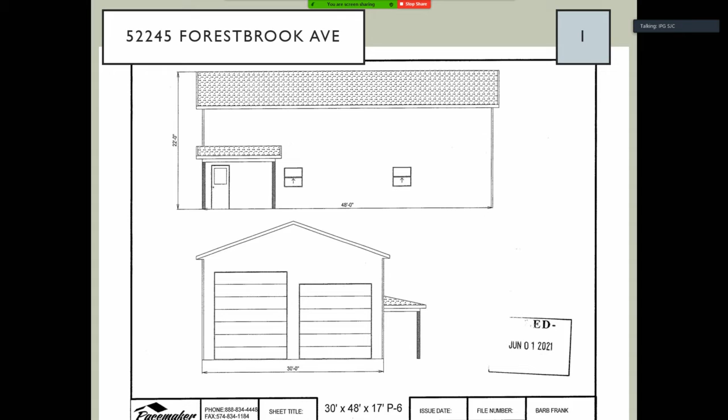So the 2-bay design is what's making the roof structure higher than what the written standard allows. There's additional site plan information in the packet and presented here. It's the staff recommendation that there's nothing unique about this property that would not allow it to be built to the standard as written, and that having such a large pole building would detract from the residential character of that area given the size of residential structures there, making it a very commercial-looking accessory building. The staff is recommending against it for that reason.

Just for clarification, this is a height request only, correct? They're meeting all other setbacks required for that spot. Correct, this is just for height.

Ryan, do you know how far back their proposed building's face would be from the road approximately? I don't have an exact distance, but they do have a site plan that they purport to be to scale. I want to say probably over 50 feet. I'm just trying to get an idea how that's going to sit next to that little green house. You don't know how deep the lot is, do you, the actual lot itself? The lot's 132 feet deep.

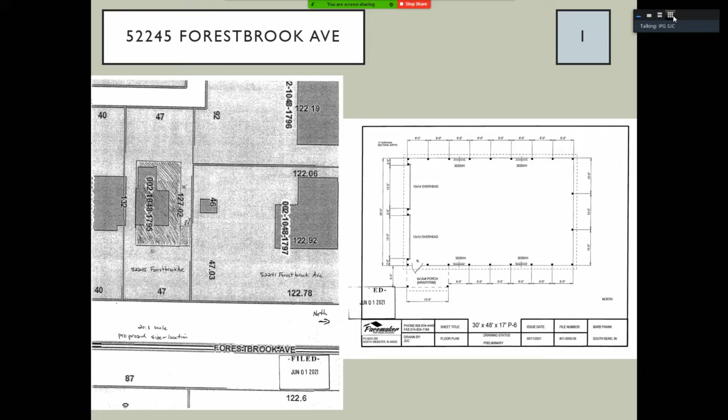Yes, ma'am, can we have your name and address for the record, please? My name is Barbara Frank. My address is 52241 Forestbrook Avenue, and I also own the property at 52245 Forestbrook Avenue.

Is there anything you'd like to add to the staff comments for your petition? Yes, I did suggest if we can't do the 4/12 pitch, my builder, Pacemaker Builders, suggested we could go down to a 3/12 pitch for the roof, and that would bring the overall height to 20 feet 9 inches.

I also reached out to him concerning what this gentleman had indicated, saying that the 19-foot variance would accommodate a 14-foot garage door for an RV, and he said you would still need a 14 or 16-foot wall height in order to maintain that 14-foot doorway. He said you would also need a 4/12 or 3/12 pitch as well for the oversized peak of the building.

Looking at the structure, is there a reason that it has to be double wide? Could you do the trailers in just one of them and shrink it down that way so it doesn't have to be so high, or is that not possible?

Right now, we have what you don't see on the pictures, or at my home. I have 2 campers, and we also have the enclosed trailer, and we need enough space to move around for both of those. Okay, how big's the biggest camper? They're both 33 feet long from tongue to tail.

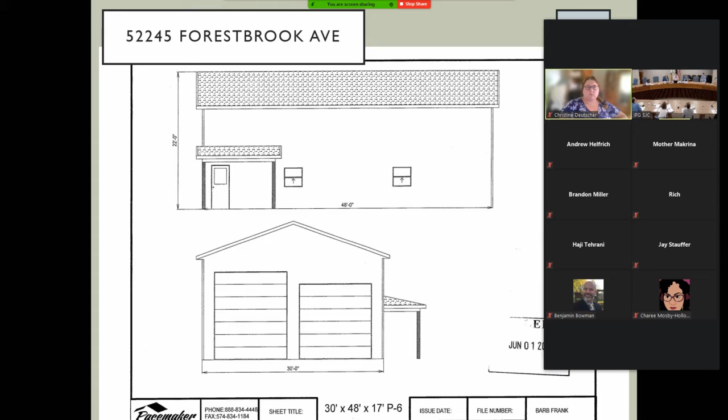Do you happen to know where that garage, the face of the garage, would be in relationship to the house next door, the little green house? Is it about equal to, or is it in front of? The current plan is just in front of it. It's about 35 feet from the road, which matches where my original house sits back off of the road itself.

We planned it out to put the privacy fence up to it, coordinated to my original home to close it off, so we thought it would be beneficial to keep it at the same face front from the road. We are not opposed, however, to set it back if required.

Thank you. I just would like to note, the ordinance will require 35 feet from the property line, not 35 feet from the road or the center line. Right, and I believe that's what I meant.

It's from, I know I have an additional, I was here a few years ago putting a porch on the front of my house, and there was a variance I had to request at that time for the same reason. Where my house sits is exactly where it should be based on the variance or ordinance originally, without the front of the porch. So this new building you're putting up is gonna pretty much match where your house faces onto Forestbrook, is that correct?

That's correct, but at the original building structure, not with the additional porch on it, so it'll actually be set back 10 feet. Okay, that makes sense, I understand.

Now, I do want to note that where my house sits, it's on a higher grade than where this property is. And I know that our request is for the 22 feet, but when I talked to my builder, the way it will be constructed, the peak should not be much higher than my house currently is.

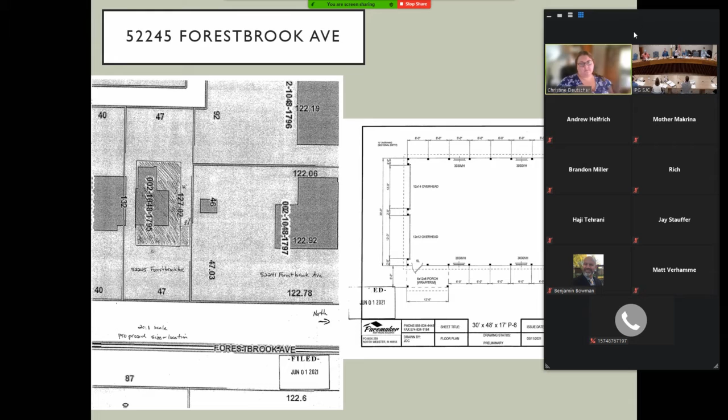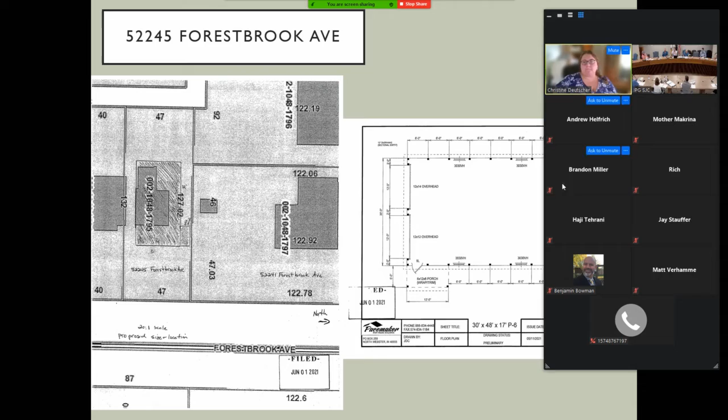I'm gonna make one comment to the staff, to find out truly what the clearance is on a Class A. I don't see many going down the road that are taller than semis, most semi-height is no more than 13. I did do research on that, and it's the exception, not the rule, but it stated that it could get up that high to 14.

It's been tabled, you can't talk about it anymore.

We have the reading of petition number 2, please, Sam. The petition of Lawrence A. and Connie L. Panarello seeking the following variances: one, from section 154.092A, to allow a lot area of 1.3 acres where a minimum of 20 acres is required for lot 2 of a proposed 2-lot subdivision. Property located at 27480 Inwood Road, Warren Township, zoned A, Agricultural District, County.

Staff, this is Sean Klein, Area Plan Commission staff. So agenda items 2 and 3 are adjacent parcels on Inwood Road. All they're proposing to do is, through a subdivision, relocate the shared property line. Basically, the property to the west of 27480 Inwood Road would like to acquire ownership of the pond area to the south of the parcel we're currently discussing. As the parcels are both zoned agricultural, once they go through the subdivision, they're not going to meet the 20-acre lot minimum standard, so therefore, to complete this subdivision, the variances would be required.

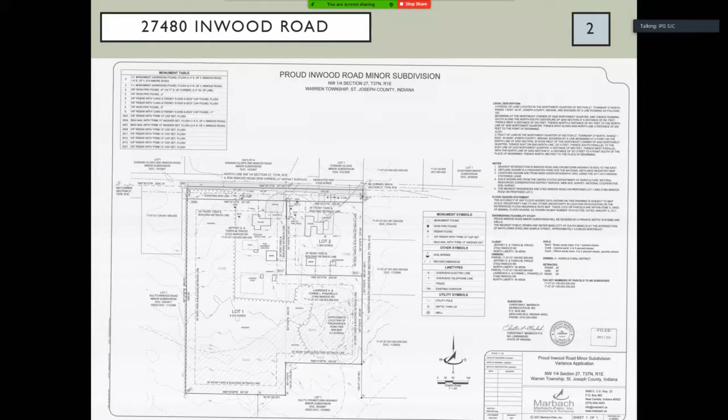So with me, I have Connie and Lawrence here today. They have 27480 Inwood Road, and their next door neighbors, Jeff and Tanya Proud, are at 27522 Inwood Road, and Tanya is here with us today as well. They are next door neighbors, located just west of the intersection of Crumstown Highway and Inwood Road. If you look at that aerial map, you'll notice there are quite a few parcels in that general vicinity that are under 20 acres, built up over the years prior to the current zoning ordinance.

This is just a small residential neighborhood kind of huddled around that intersection. Connie and Larry had some medical issues, and they feel they can't maintain their entire 3-acre parcel, highlighted in yellow. The back half of that piece is a nice, well-manicured pond that they don't want to see deteriorated because they can't maintain it anymore. So they approached the Prouds next door to see if they'd be interested in buying that piece from them, creating their parcel larger and downsizing for Connie and Lawrence. The Prouds said yes, they'd like to help the neighbors out, buy that property, and add a pond to their piece.

So that being said, the current zoning ordinance requires a 2-lot minor subdivision and this variance application because of the 20-acre requirement. We are basically just swapping a lot line between 2 residential homes. We are not making any more buildable parcels, and we are not taking away any more agricultural ground. As the staff mentioned, I would hope that you would approve their recommendation as well. Very good. Any questions for the petitioner?

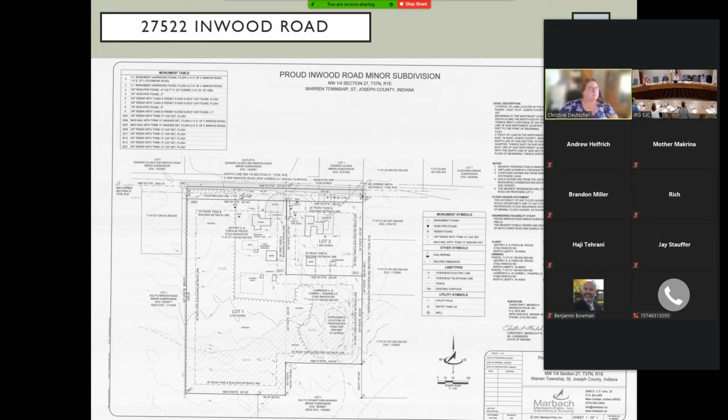Staff? Yes, sir, Ryan. Okay, this area is also in the agricultural district.

You do have another example where the lot size is residential in size rather than 20 acres or more. The zoning ordinance side yard setback for agricultural district is 30 feet, and it's designed so that if the neighboring property has tilled soil, any stones hit by farm equipment, dust, manure, or anything spread might not hit an adjoining structure.

So a 30-foot setback is appropriate if the neighboring property is tilled. In this case, it is not; it's a residential-sized neighboring property. The property just to the left on the screen also has another single-family home. In this case, staff is supportive of the requested variance due to the size of the lot being so much smaller than the standard 20-acre regular minimum requirement.

And I'd be happy to answer any questions. Any questions from the board for staff? Good, all right. Yes, sir.

Are you the petitioner? I am. Yes, I'm the property owner. You can see there's an easement driveway. I need your name and address for the record, please. Jason Lee Goodsell, 26511 New Road.

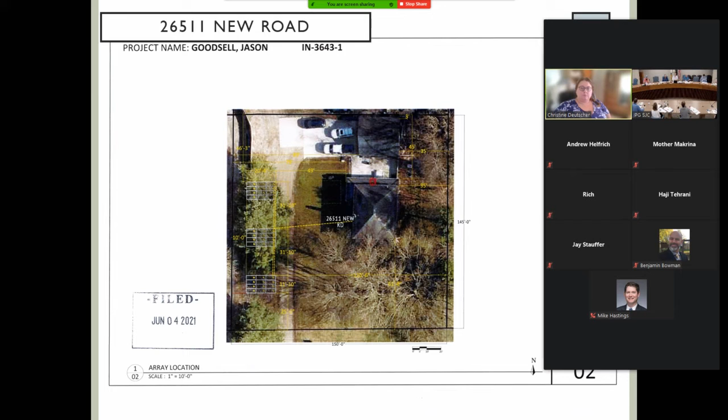This is Sean Klein, Area Plan Commission staff. This petition concerns an existing monastery on Early Road, just south of New Carlisle. It has been in operation for over 27 years and appears to be legal non-conforming. At least part of this property was zoned agricultural at some point in the past, which allows for a monastery by right.

This issue came to our attention when they attempted to apply for a permit for a new building. The way our zoning ordinance is structured, a legal nonconforming use can continue to persist indefinitely, but it can't be enlarged in any way, and that includes construction of an additional building. So they need this special use in order to fully legalize everything so they can continue to use it fully and actually be able to construct new structures.

I would like to remind everyone that for a special use, we're making a recommendation to the county council in this case. There are 4 criteria in state law to consider whether to make a favorable or unfavorable recommendation. The first being that the proposed special use will not be injurious to public health, safety, comfort, community moral standards, convenience, or general welfare. The staff finds that it will not be injurious to any of these values.

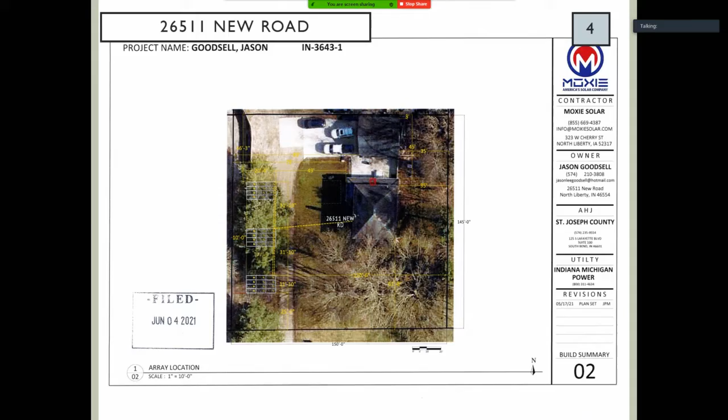Is the petitioner on the line or in-house? Andrew Helfrich with Barnes and Thornburg. I'm here with Mother Makrina, the Mother Abbess. And as the staff put forth in their report, the drive behind this, it's been a monastery for pushing 3 decades now. And at some point, we believe maybe the zoning had changed from ag to residential, or at least, as mentioned, a portion of it. And when they went to obtain the building permit for their structure, that's when we became aware of this problem. So we're just asking that the use be permitted so they can continue their religious instruction there.

Any questions for the petitioner from the board? All right, thank you very much for your input. The public portion is now open. Anyone wishing to speak in favor of or have questions about this petition? Anyone wish to speak in opposition to? Seeing and hearing none, the public portion is now closed. Is there any additional comments, questions, or I will entertain a motion?

The only thing I was surprised it's zoned residential that far. I mean, it's not that far outside New Carlisle, but if that's a recognized area we want to add additional housing in, that's a good area, but I don't think a monastery is going to affect anybody building a house by it. They're probably about the best neighbors you could have.

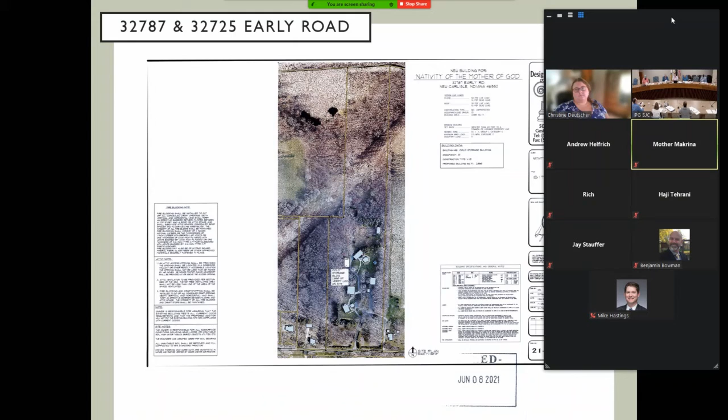The petition of Fur Road Holdings LLC seeking the following variance: 1, from section 154.107C1 to allow a front setback of 25 feet where 35 feet is required for each lot in a proposed 112 lot subdivision, property located at an unaddressed 44.39 acre parcel immediately west of Clover Road and south of the Michigan-Indiana state line and the adjacent 41.2 acre parcel to the west. Harris Township, zoned R, Single Family District, County.

Thank you. Yeah, this is Ryan Fellows, Area Plan Commission staff, and as you can see, the area drawn on the map above, as described, it's along the state line, just west of Clover, and this is a proposed, as said, 112 lot subdivision. All of the other subdivisions in this area have, here's a picture of the vacant lot right now that has not been developed yet. And then this is just to the west of that.

And so this is a sample of the residential character of the adjoining neighborhoods in the area. You see the street has a less than 45-foot wide right-of-way with homes set back 25 feet from the right-of-way line, and they're trying to match this residential character.

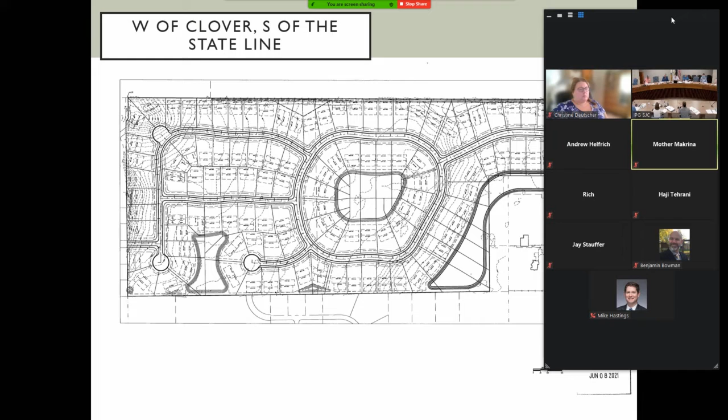As noted, this is the last big open piece of property around the old Millwood area. We ran into this a bit when looking at providing connectivity out to the west, noticing and recognizing that the road right-of-ways are significantly narrower in the existing subdivisions around there.

In addition to wanting to match the character of the surrounding neighborhoods, given the 40-foot rear yard setbacks required for septic systems for the homes, the additional 10-foot reduction from 35 to 25 feet for the front yard setbacks allows homeowners a little more usable backyard space, giving them flexibility for accessory uses, pools, those kinds of things, which are going to be pretty desirable in a subdivision like this.

As noted, it's a 112 lot subdivision. I think it's going to be a nice investment in the tax base for the county when this is all finished as well. So happy to answer any questions you might have.

So it looks like there's an entrance off of Clover, and then another one to the existing subdivision over on the west side—is that planned, so there'll be two egresses? I think we're doing the connection to the west. This has already gone through the primary plat approval process. We're only asking today for variances on the front yard setbacks.

All right, any questions for the petitioner?

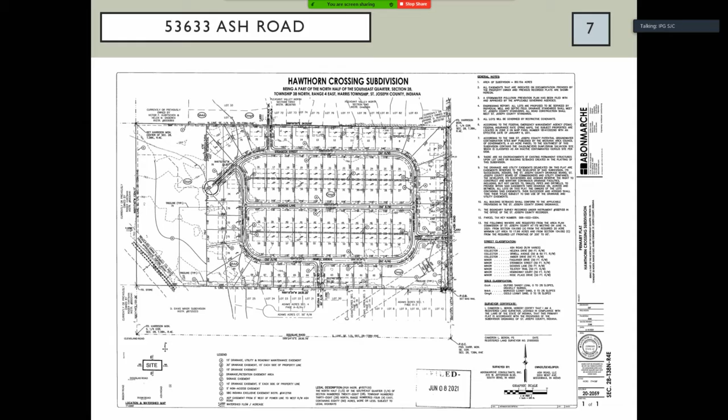And the other thing is, you talked about the flooding to the west, but to the east that area floods every time you get rain, so I assume somebody's going to address that and tell the people, because the new subdivisions, I don't know if these folks were involved or not, but if you go through there in a moderate rain, everybody's got these big 4-inch pipes going out to the street. From their homes? It's a high water table.

That will be addressed in a different hearing, so unfortunately I have to come back to the city county building again, but that is out of our purview today, unfortunately.

Okay, thank you. Sir, do you live in Elkhart County? I do. I'm right across the street. Thank you for your time today.

Anyone else wishing to speak in favor of or have questions? Anyone wishing to speak in opposition to? Seeing none, the public portion is now closed.

Any additional comments or questions from the board, or will entertain a motion? I didn't really quite figure it out until seeing that we're just worried about that one last portion, because I'm like, well, we haven't approved any of this residential split yet, but it's already ours, so it doesn't matter. We just have to worry about the ag side of it, so that's the difference.

With that being said, I would like to make a motion that we approve the request for the property located at 53633 Ash Road. Donnie Ritzema, and I'll second.

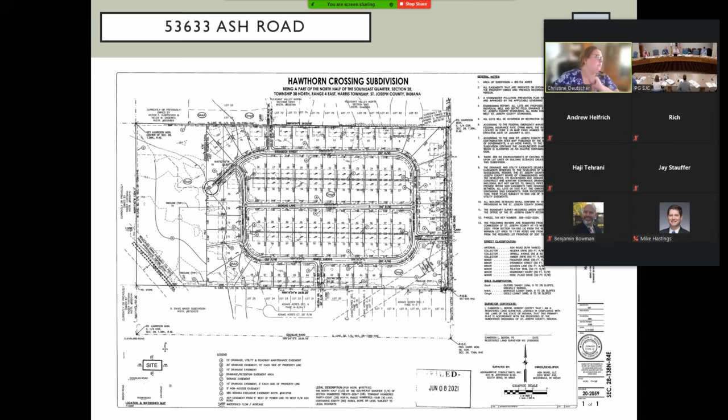Thank you, Mr. Huber. Thank you for your time, sir, Mr. Wickstrom. Appreciate your input. If you stick around for a moment, Abby will give you some information. Thank you.

Then we have the reading of petition number 8, please. The petition of Sisters of the Holy Cross, Inc., seeking 11 variances as requested on the agenda and petition, will be reproduced in full in the minutes.

Great, that was a very concise way to put that together. Thanks to Brandy, good job. I was hoping she was going to read them all. I was not hoping that.

All right, this is Sean Klein, Area Plan Commission staff. So this looks really bizarre and unwieldy, but what it really works down to is a unique situation that the zoning ordinance really isn't equipped to handle. Basically, St. Mary's needs to do some renovation on a parking lot and 3 buildings, I believe. In order to get financing from a financial institution, they need to own these properties in fee simple, which means they need to be on separate parcels so they can be transferred to them, which means they need to go through a subdivision ordinance, which further means they need to either meet all the development standards or they need variances.

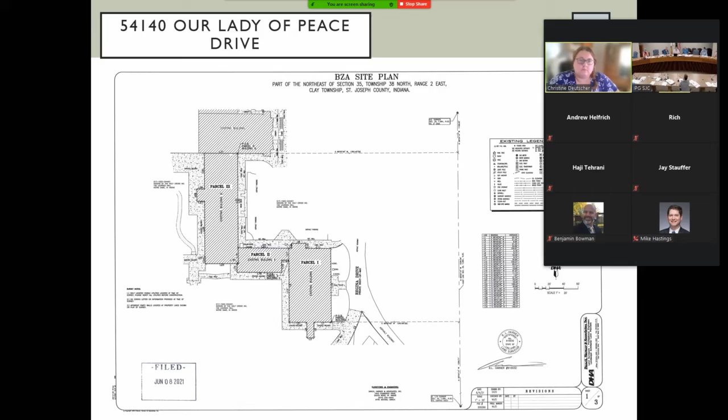One of the other unique things with the St. Mary's campus that we've got is actually 2 zoning classifications. It's kind of like half the campus is zoned university, which would allow me to do certain things under that university zoning. But the portion where all these renovations are happening, at least the ones proposed here, is actually under A agricultural.

I have had discussions with the head people at St. Mary's campus over even the last couple of years. They were kind of hesitant because they don't understand zoning, for one, on actually going through a rezoning process to rezone the rest of the campus as university. But even when Sean and I had talked about it, even if the whole campus would have been zoned university, I still would have been before you to ask for some variances for the way we have to do these particular splits.

So mainly what we're asking to do is be able to create these 4 splits. We will go through a minor subdivision process, assuming the board would grant us the variances. And again, it's just to allow for the renovations for the buildings themselves. I'm trying to be in compliance with all the agricultural zoning issues, and since this is a university campus, this does not look like the regular agricultural variances that we always ask for.

So what we would hope that the board would do is grant us the variances so that I can proceed to the minor subdivision stage.

The attorneys for the campus also, for the access things that we were talking about, have an overall agreement that allows for almost any use on the campus to be able to get out to State Road 933. And sometimes you don't think about it, but there's also a utilities building for this that supplies water, sewer, gas, and electric to all these structures too. So they had to have an agreement in place to allow for that to happen as well, so that you can continually add the services, or have services for everything, and be able to get over the existing driveways out to 933 so you have access to that public roadway.

May I share? I would like to share screen. Can I do that also? I have this in the Dropbox, but I think it's valuable to show you what I'm competing against in the area—buildings that are worth a fraction of just a small part of our building, buildings worth $200,000 if that. This is a $5 million project, by the way, minimum. That's just the construction cost.

We are asking for this massive investment made into the county to be far less represented and far less visible than existing structures that advertise other buildings we have to compete against. Because if you're traveling, your eyes come in contact with the biggest thing, which is typically a billboard, then after that the next biggest thing, which is all these other big signs I'd like to share.

May I do that? You should be able to now. Okay, great.

Jay, if you want to add any comments as I go through these pictures, Jay is our sign person who's worked with us from the get-go on every one of our sign locations, so he knows the expectations we have as far as quality. Jay, I think it would be helpful to set the stage for what it is that we do and why.

Hi, I'm Jay Stauffer, I'm with Vanadco Signs in Argos, Indiana.

Haji, double click on whichever photo you'd like to discuss. Is it not up there yet? We've got all the photos in a thumbnail. Oh no, I wanted this one up. How do I get out of that one? Double click on whichever one you want. I did, I double clicked and brought it up. Two screens, that must have opened another screen, then you have to move it to the share screen you're presenting on. Oh, I think I have to move it to the other side. Forgive me, let me reduce the size and bring it over. Does that work? Oh no, I have to tell it what I'm sharing. Forgive me, I figured it out. Now I have to move it back to the other side. I think I got it figured out. Let me close this. Bless you. Okay, I think that worked, right? There you go, sorry about that. I use Teams as my means of communication, this is a different format, so forgive me for not knowing how to operate it.

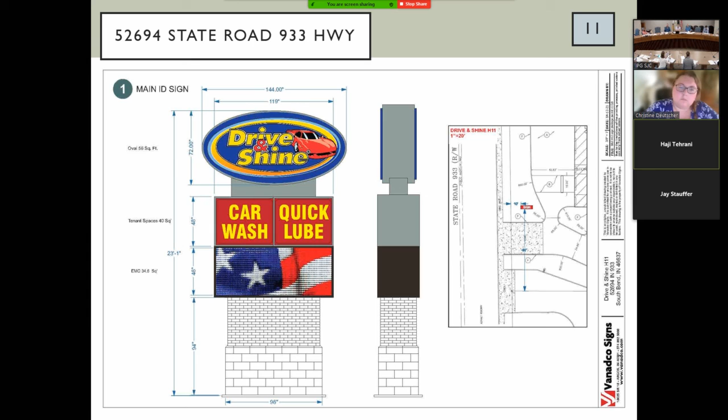There's no relationship between the Quick Lube - they have their own separate employees, their own separate everything, their own separate menu. It's no different than a strip mall. But I understand that your current guidelines say you have to have 3 businesses, when we really do have 2 businesses.

I think that 140 should be the absolute minimum to make it even. But even at 140, what do I have to do to the base? You suggested 160 as an option - would that be on the table? How much can I reduce the width of this masonry and still meet the guidelines?

Did you say 75%? I don't know - we're getting into calculations that we really probably ought to table, and let staff work with you to figure out what that is and try to work out an equitable situation, because for us to try and do this on the fly isn't going to be advantageous for you or us.

So I guess I'm making a motion to table this till next month, with the petitioner to work with staff to get an equitable, agreeable situation where they're somewhat satisfied with what we can do and we're somewhat satisfied. And if you can't, then we'll petition again, and we'll go through it again and let it fly as it goes.

We put an ordinance in place that we try to adhere to, but there's also some limitations. I don't want to spend another 2 hours trying to figure out what size it could be, so I'd rather not do that. I'd rather let staff work with them, or we just split the difference. Right now we're at 67 square feet difference. So I second your motion.

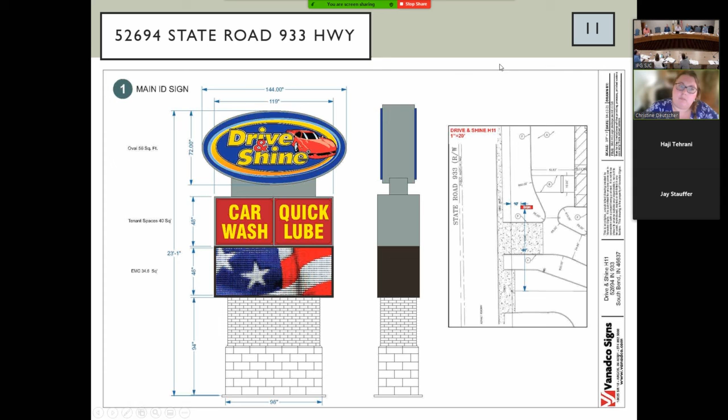Mr. Tehrani, Mr. Stauffer, I think there's an equitable movement that we can make each way on this to get you close. Obviously staff has already made some major movement off the 100 square feet that we currently allow through the ordinance. The multi-tenant case could be made for in my mind, but I can't speak for the entire board. But you're going to have to come off your 207 to get this board to do anything for you. I can tell you that right now.

What number are we targeting to work on to see if that's doable? You already tabled it, you can't talk anymore. Unfortunately, since we tabled, I can't talk about it anymore. So that'd be something to talk to staff about, and they'll be able to give you a good idea on that. Can I ask a question of them? Nope, it's been tabled. Sorry, Bob. It's done for today. We can't discuss it once it's been tabled.

I'm sorry. And gentlemen, Christine, if you were to sign off, then they could finish the meeting with no roll call votes. Gentlemen, thank you for your time. Appreciate the input. We do want to obviously get you working in the county. We just want to find an equitable solution for everyone. So thank you, and Christine, thank you very much. You want me to leave? Bye guys, I didn't know you had to. You don't have to, you could. I'm gonna. Abby hasn't given her update yet.

Can I now bring up a question that I can ask everybody here? Oh, everybody here? Yeah, as long as it's not about the petition, yes. If you want to ask a question about the petition that was tabled, the answer is no. If you want to ask about other things, yes. Sorry, all right. Can I meet you afterwards? I think what I'm gonna ask is important, that you understand this about what I'm gonna say. Can I ask you, just you, Abby? I don't think that's a good idea. Not at this point, unfortunately.